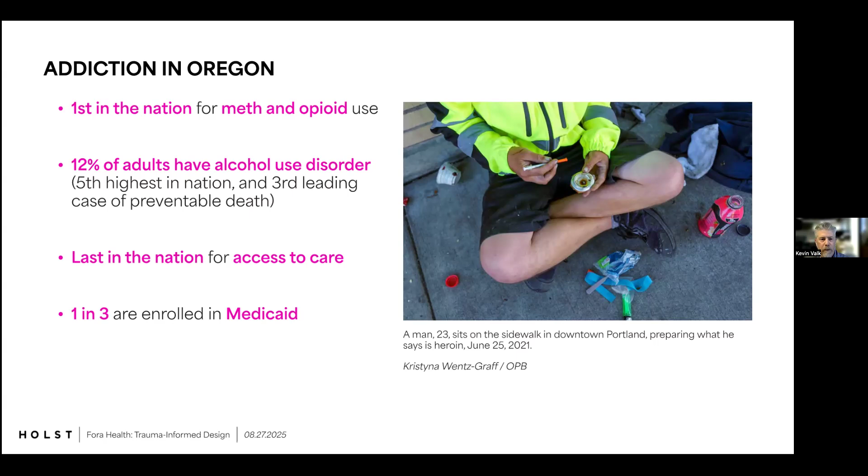Fora came to us with a mission that included essentially recreating their identity as an organization. They had done tremendous work for quite a number of years, but they were stuck in a 4-story building downtown that really didn't suit their needs, didn't have an elevator, and really limited the kind of care that they could provide.

They really had this vision of creating a healthcare environment for substance use disorder, and to treat folks who have that with respect and dignity, and provide them with the best potential or chance of a positive outcome. So they came to us, and they had Swen Ho, who some of you might know with Resolve Architecture and Planning, who was also with U of O for a long time, on their board at the time.

And she worked with them to create really a number of goals, and even some sketches to represent what that could be and the feeling that they were looking for. And so we started this process with them, looking at that and understanding their program.

They were looking for 70 adult treatment beds, 24 medical withdrawal management beds, also known as detox, and an outpatient clinic to serve 450 people. That, I think, doubled what they could do in their downtown location at the time.

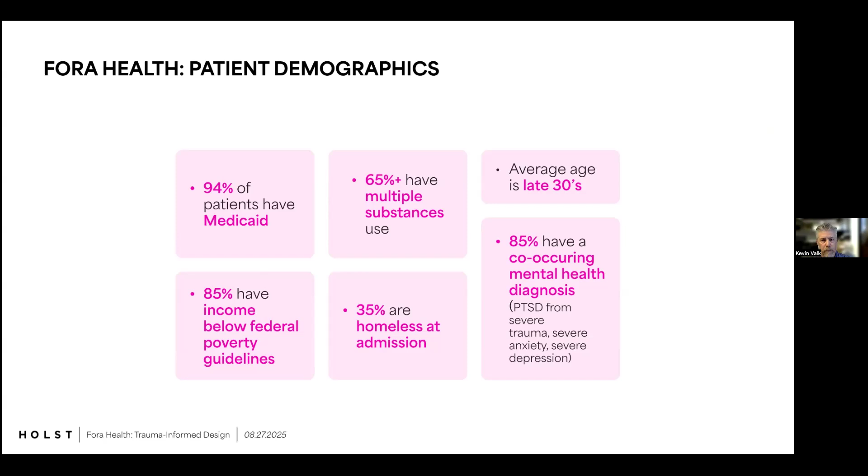Thanks, Kevin. I think having that demographic information really helps us understand why trauma-informed design is so important in the substance use treatment space. A lot of people are coming into the space from a place of pain.

So I'm going to give us a quick primer on how we think about trauma-informed design and some of the strategies we've tried to implement, and then we'll look at how those were applied to this building. We're always learning new things in this field, and it seems like every new conversation with providers and peer groups gives us some new insight. So we're not experts in trauma-informed design, we're learning alongside everybody else. But this is what we know right now.

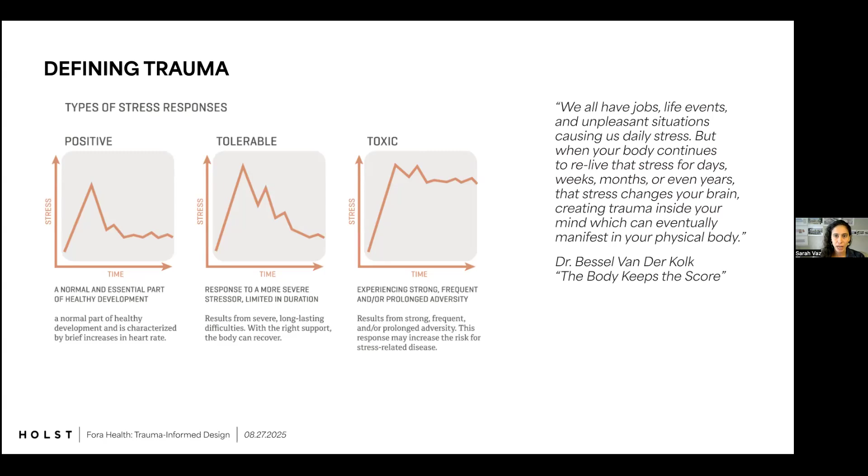I found this working definition of trauma to be useful, really understanding it as a physiological stress response in the body. The left-hand graph shows a healthy stress response where your heart rate spikes and then drops quickly once the body assesses that there's no threat. The right-hand graph shows a trauma stress response where once your heart rate spikes, it stays elevated, and that can be really challenging to come back to a neutral state from.

So our goals for trauma-informed design are twofold. On one hand, we have reducing stressors in the environment to avoid triggering that stress response in the first place. And on the other hand, we're also trying to foster well-being in folks so that we can bring people back to themselves in their healing journey.

Our strategies fall into six buckets. On the reducing stressors side, we have comfort, safety, and de-escalation. And on the well-being side, we have comprehensibility, meaningfulness, and manageability. We've shared a lot of specific information about these strategies on our website. I'll touch on how these relate to the addiction treatment space, and then we can get into how they work in this building.

For reducing stressors, comfort: we found acoustics and lighting in particular to be of concern in these spaces because of the construction type. We end up with a lot of firewalls or fire partitions, and doors in fire partitions have to have closers, and those closers tend to slam. That becomes a big problem for sound. Any hard surfaces in spaces like dining halls or bigger gathering areas tend to bounce sound around and feel chaotic, reminding people maybe of being institutionalized, so we're incorporating acoustic treatment wherever possible. With lighting, people in recovery or going through withdrawal often have heightened light sensitivity, so dimmers and indirect lighting become really important.

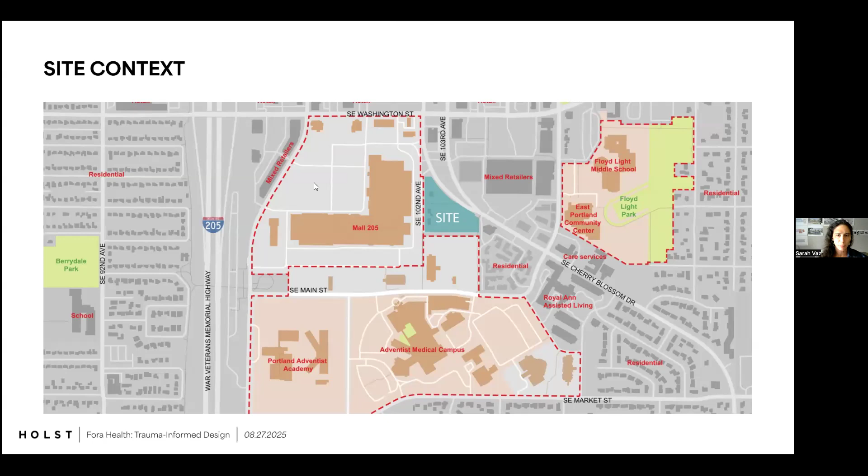So I'm going to talk us through the design points, and then Kevin will jump in with some of the things we've learned. To give quick context, we had this oddly shaped site behind Mall 205, north of the Adventist Medical Campus in East Portland. We had a nice stand of old growth trees at the north end of the site, so we knew the building would be pushed to the south. We also knew we would need to incorporate green space, so we started with an enclosed courtyard, which evolved to open up and really embrace the whole site.

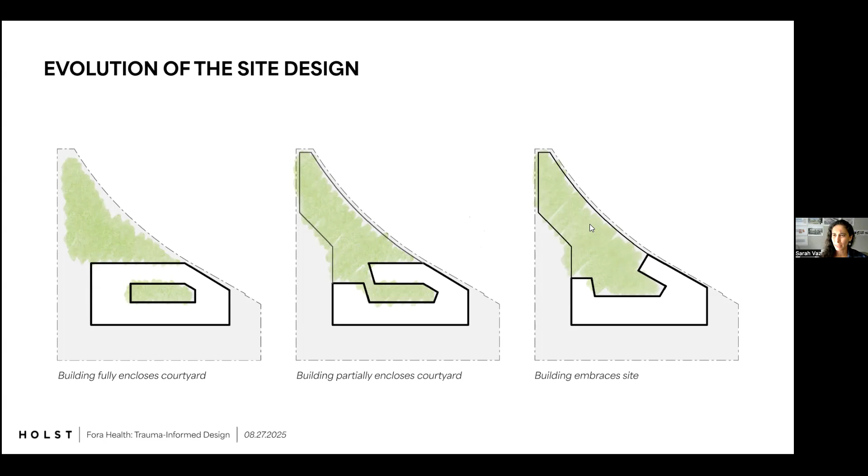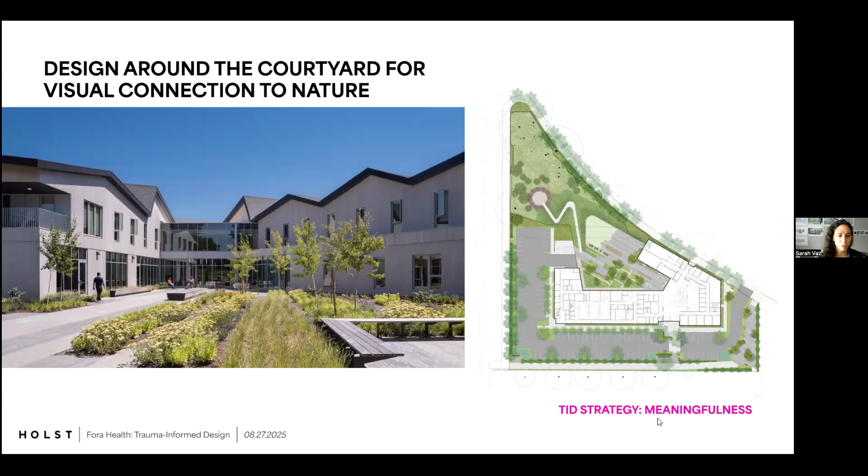Opening up the building to the outdoors became a really key way that we created that physical and visual connection to nature. That relates to the trauma-informed design strategy of meaningfulness.

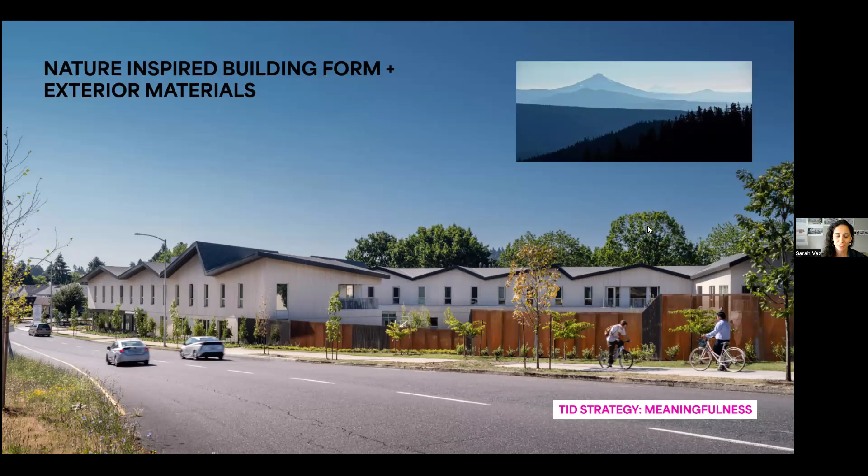The building itself is made of stained Western red cedar, and the roof form has these asymmetrical gables inspired by the Cascade Range—a further attempt to connect back materially and conceptually to the natural beauty that surrounds us in this part of the country. Again, the meaningfulness strategy.

And another point on the exterior: we've got this really strong entry that helps people coming into the building for the first time know exactly where they need to go.

Some of the lessons we learned through our investigations and our understanding of the next projects we're working on—some of them positive, some less positive. But in this case, a lot of our lessons learned were pretty positive takeaways.

So the courtyard actually became even more integral to their operations than I think we ever imagined. We knew the outdoor space would be hugely important, which is why we organized the building around the courtyard and enveloped the site with fencing. It's become a huge part of their program and their treatment—I think more than they could have envisioned before, with their location downtown.

The warmth of the wood on the exterior really helps foster that sense of welcoming into the site and into the building. It's something we've actually been working with them on across multiple other buildings—rather than form, we're bringing materiality across projects, which has proven quite helpful.

And the obviousness of the entry—it's easy to think, as designers and architects, about how important that is. Sarah and I were talking this morning about how, for us, it's very obvious: you approach the building and know this is the entry because we worked on it for so long. But we think there's a clarity to the composition, a clarity to the material change. That's something that's hugely important when creating a campus of buildings, which is what's happening on this campus and other locations—to create that sense of entry and identity, to make it very clear to folks who don't always have the clarity of mind to give it as much thought as we might want, that we're providing that obviousness to the building.

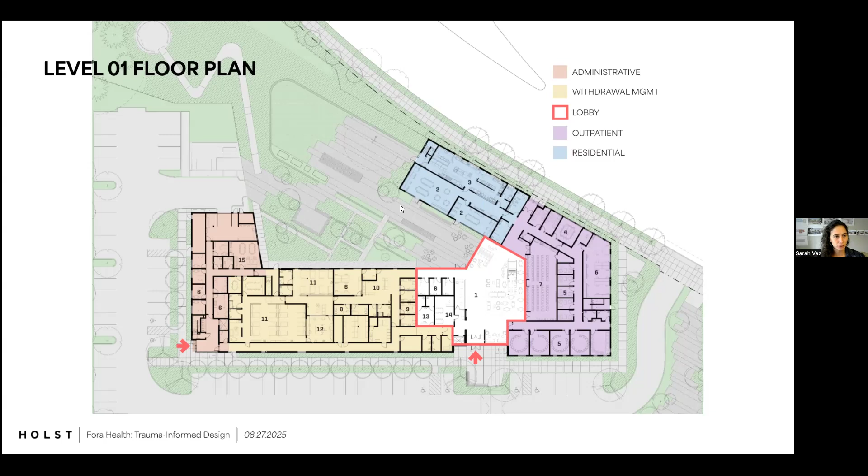By having staff greet you and point you in the direction you need to go immediately upon entry. So you can see admin is in orange, withdrawal management, or detox, is in yellow, outpatient is purple, and residential is blue. Residential is primarily upstairs, but downstairs they have their dining space.

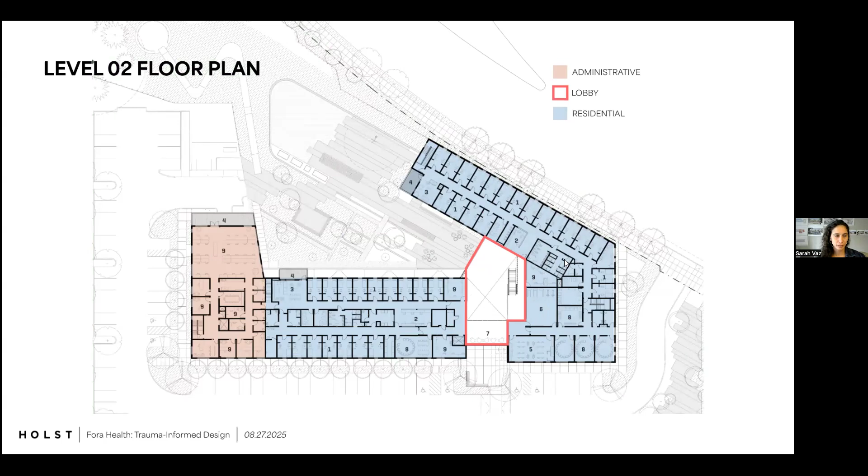But we did learn some things. Although I think the lobby and the diagram of the building really achieved the goals they came into the project with, once they started operating, it became clear that they might want to rethink their goals.

So it brings a lot of folks together into one space. Unfortunately, what it can do at times is create a lot of confusion. There's a lot of folks in the space with different programs, and so there's some safety concerns at times.

COVID didn't help. They created a separate entry during COVID for withdrawal management, so that folks coming into that program weren't coming through the main lobby. That was really an eye-opener for them, that running the program with separation is more important than having a single desk.

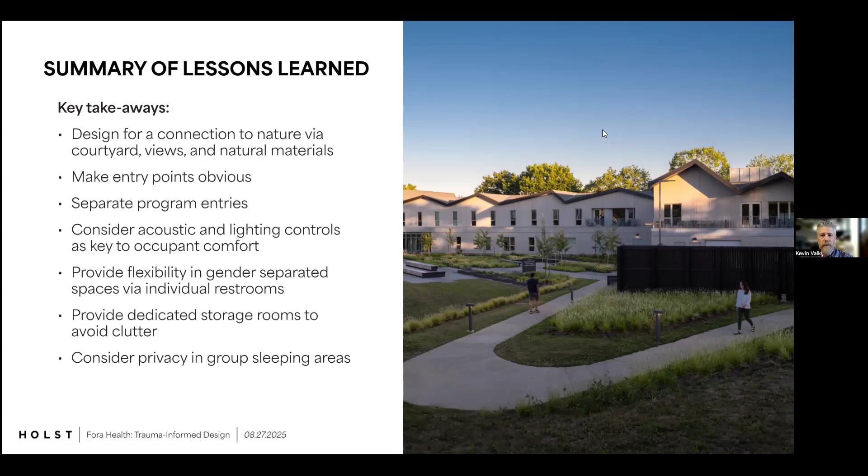So I think we just went through all of those, but for us this is an ever evolving process with these clients and with the community at large. A lot of providers have a difference of opinion on how things should function and operate, so we're using all of the projects we're working on in this space to take our steps from one to another. What have we learned? We're sharing across projects and with different clients about how we can perfect spaces for folks, knowing that needs change, and the substances people go through or come off of change. How do we create a space that, regardless of all that, is still respectful, peaceful, and meaningful? That's our goal now with all of these projects.

Some of the outcomes we've been able to learn from Fora: it's really allowed our treatment completion rates to exceed the national averages, which is wonderful. 100% of their patients leave this building with some place to live, and that's one of the things we're most proud of. That's not because of the space itself, but it gives them the ability to reach out to other providers and make connections to the community to provide that. Higher acuity patients get treated, something they couldn't really do before at their downtown locations. Adjacency to the Adventist hospital also allows primary care relationships to be strengthened between their clients and their providers.

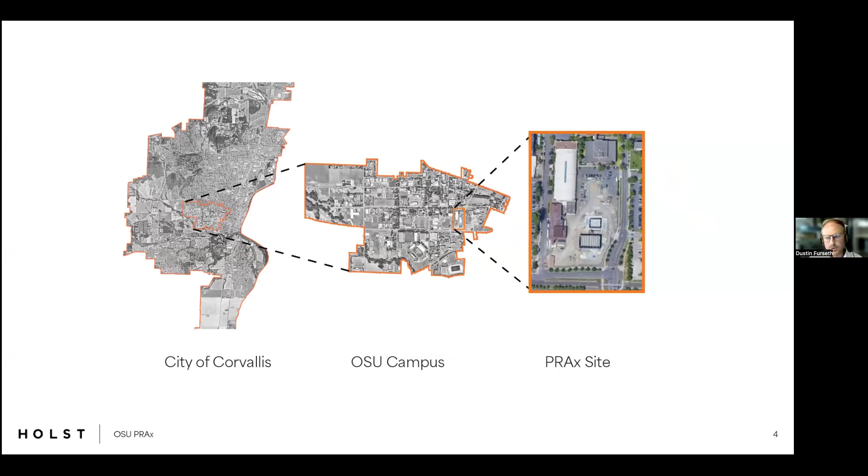So just to quickly orient everyone, in the off chance someone doesn't know where the OSU campus is, we're in Corvallis, on the eastern side of the campus, close to downtown. This was a site that had sort of university service sheds on it, so it was kind of an open slate site.

So a big part of our initial process figuring out what we're doing with this building was a lot of discussions with OSU, and we decided we needed to create a list of guiding principles to help us choose, pick, and evaluate design on all scales.

So we obviously started with creating a cultural arts district, and what that really meant here was it's going to be a new hub for visual and performing arts. We wanted it to become an iconic destination, unique, with valuable culture and dynamic architecture.

We wanted to collapse distinctions, which I talked about—this idea that there's not a front of house and back of house, or at least we blur the line between them. We're prioritizing education.

So every space needs to be a teaching space. It's going to be an art incubator space, so that influences the program, our decisions about where we're putting student art versus professional art and how that's being displayed.

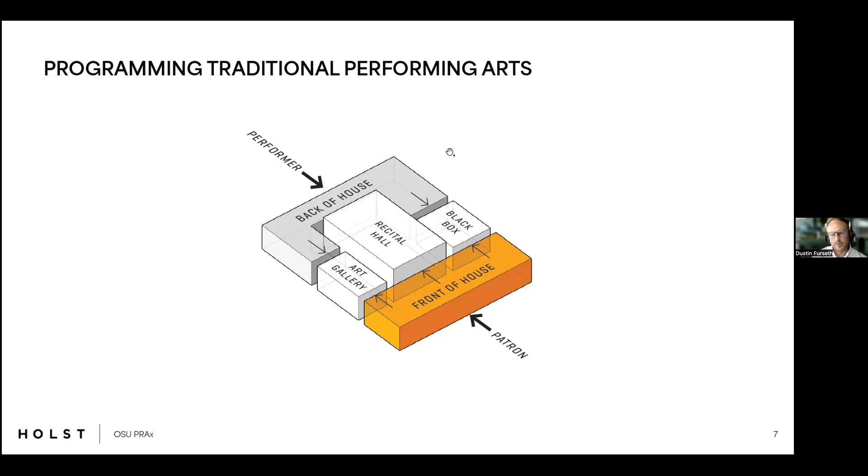So one of the first ways we tried to collapse that distinction was to pull some of that lobby through the middle. That enhances the acoustic separation between the black box and the recital hall so they don't share the same walls, but it also starts to let a patron who's there at a show walk through areas that would traditionally be off limits towards the back of the building.

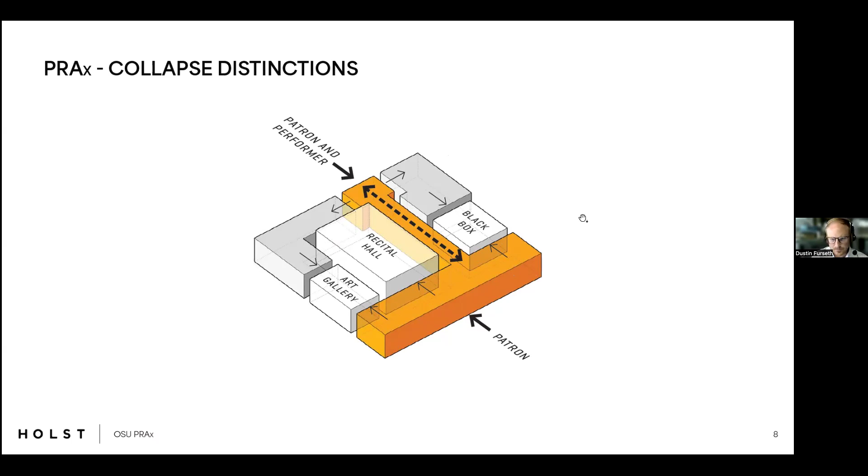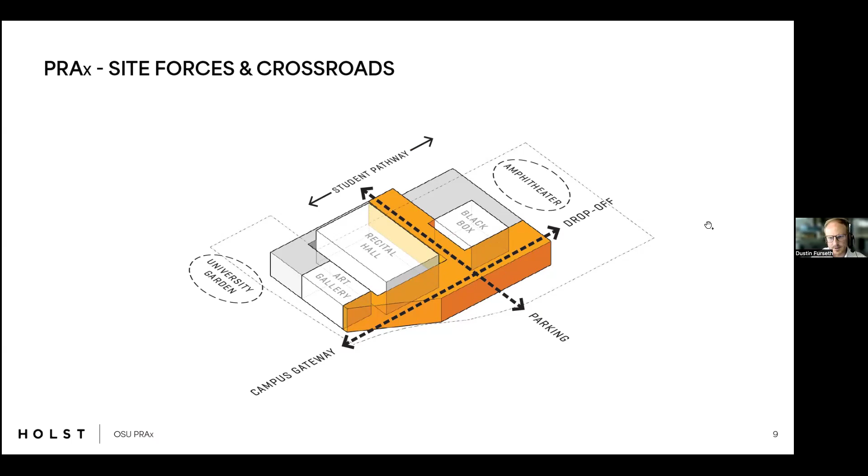Then that morphs - this is a diagram, as we blend it into the site, it has some geometries you'll see in the architecture, but really solidifying this idea of a crossroads of students, performers, staff, and community members, using the lobby as this piece we celebrate in the architecture, and it expresses itself on the exterior. That led us to a form that we started to pull and carve in a conceptual way.

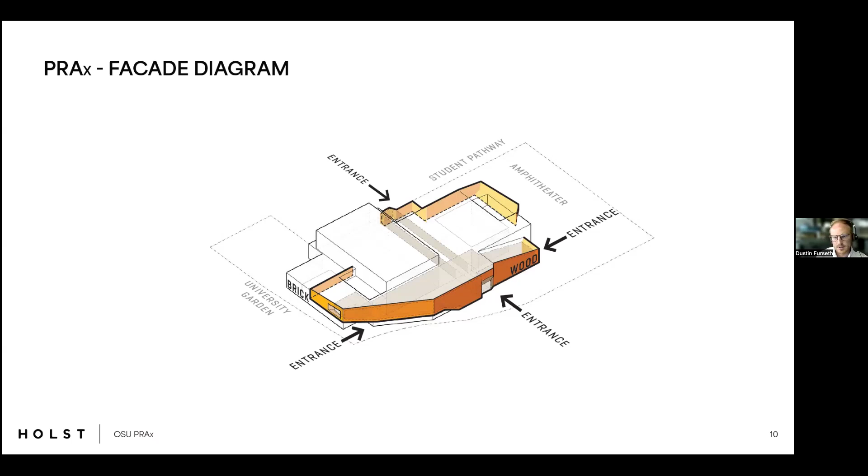Then we started to marry that with a material palette that's kind of OSU identifying - wood. They have timber research on campus, and obviously we're in the Pacific Northwest, so we really wanted to use wood as a major expressive element on this building.

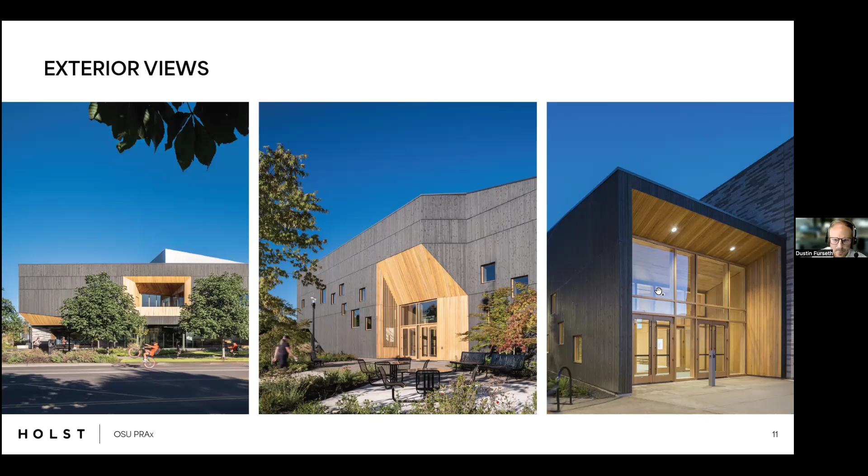So the images I'm going to show you here are just a couple snapshots around the building. When you see the vibrantly stained natural cedar, that indicates an entry or some major point of interaction with the building. The building has 4 entrances, with elements carved away where people can occupy an upper terrace on the left. Center image is the main entrance on the east of the building, and the image on the right is the entrance on the north, and then how that wraps around the building.

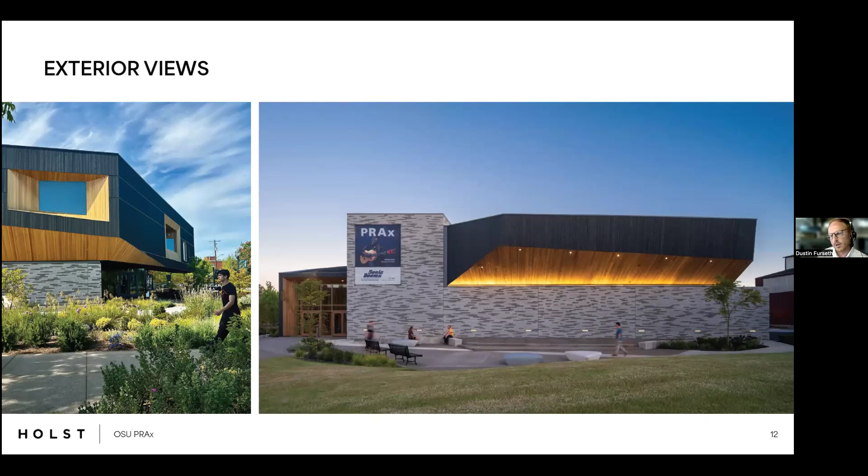There's an outdoor stage amphitheater space here on the right, underneath that overhang. It's a projected volume out towards us, and the angle is cut at an acoustic angle to project sound without amplification onto the knoll that we're standing on.

And then as we look at the material palette, we wanted to use brick - it's a big thing on campus - but we wanted to be much more neutral so that the darker, rich wood of the entrances really pops.

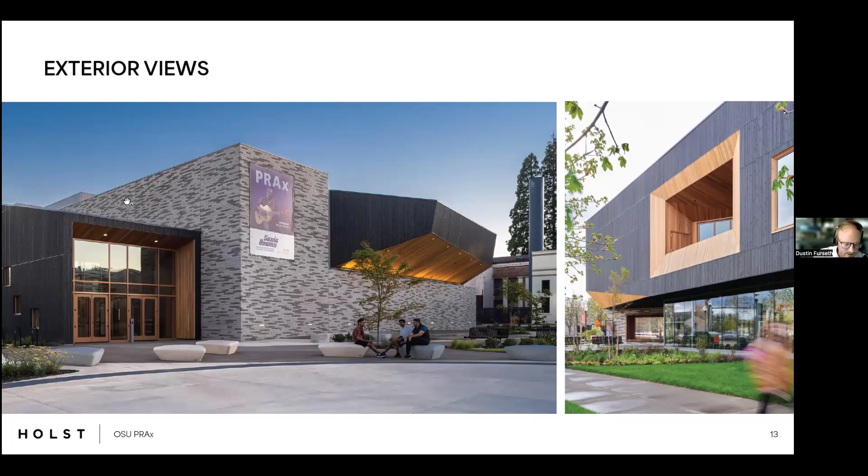I'll quickly talk about the plan, and then I'll let Kim walk us through the more illustrative photos of the interiors.

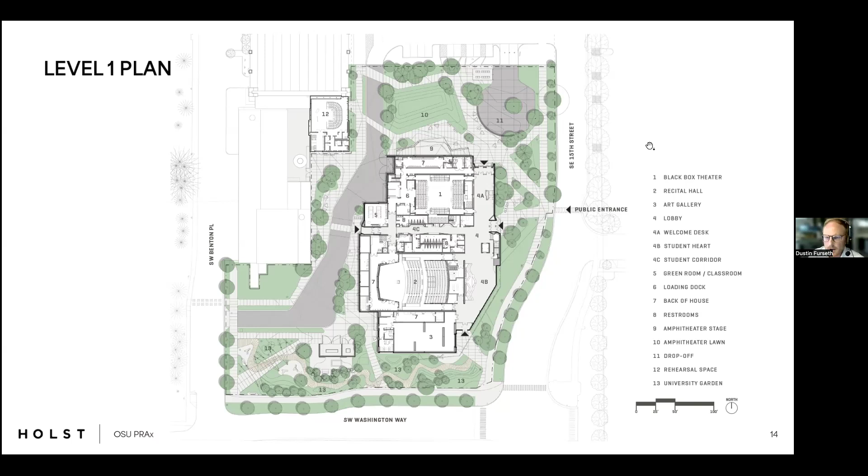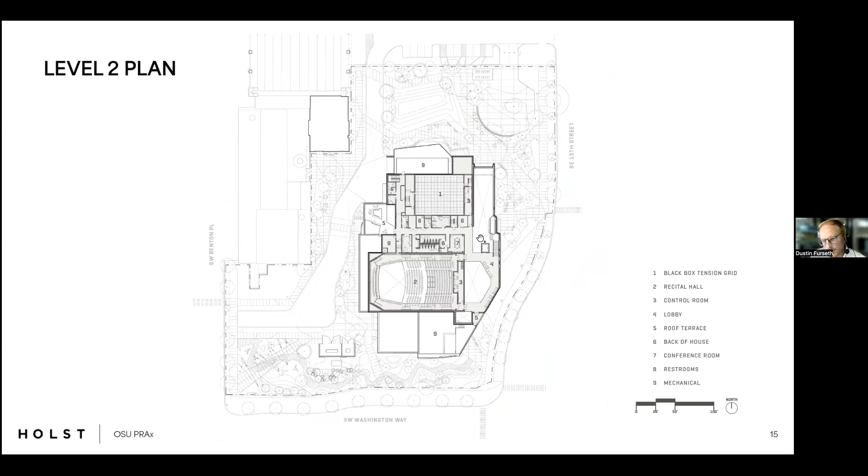As I transition to Kim talking here, we're going to start in the lobby. The lobby is broken into about 3 different spaces - they're associated with the venue, but also with different uses. There's a second level, but it's mostly about support and circulation into the recital hall, but it also has a lot of the student spaces in the spine that goes east-west, ending at the lobby on the east and on the west at a roof terrace.

In this space, it's one of the more refined kind of palettes that we have in the project, but you'll see that as we work our way down to the south end, we start to pull away some of that refinement of the wood and expose more of the structure of the building, in a similar vein of the collapsing distinctions that Dustin was talking about. We're always trying to do that push and pull to see how the building's really working and put together.

Of course it's a pre-function space to support both the black box theater, which is the Ray Theater just to our right, and then as you go down toward the art gallery and the performance hall, the reception desk also pulls away and banks back - it's on rollers and banks up against the wall, again in an effort to utilize the space for banquets or exhibits in some way.

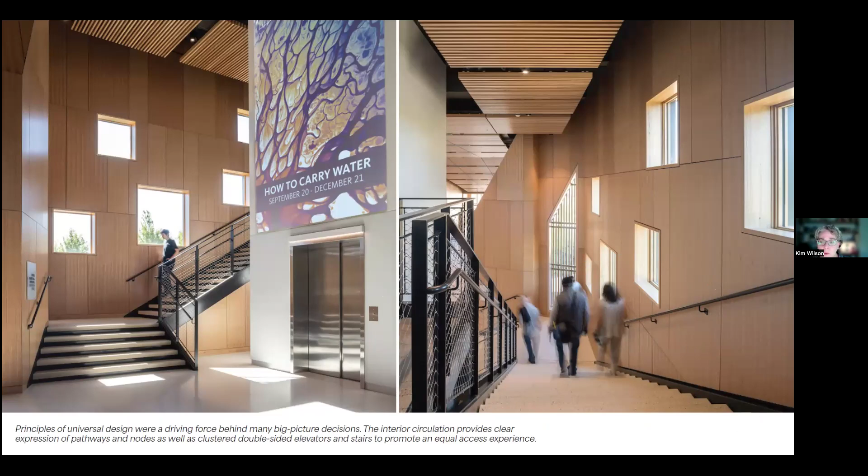So it's fully equal, and accessibility is at the forefront. We designed this elevator to be a pass-through, so there's no turning around once you get inside. It puts you out on this mezzanine second level that overlooks the student heart area.

You'll see the exposed structure, which we took some care with, and have to shout out to Hoffman Construction and their subcontractors for all the work coordinating these elements. Exposing structure is not simple, as everyone knows.

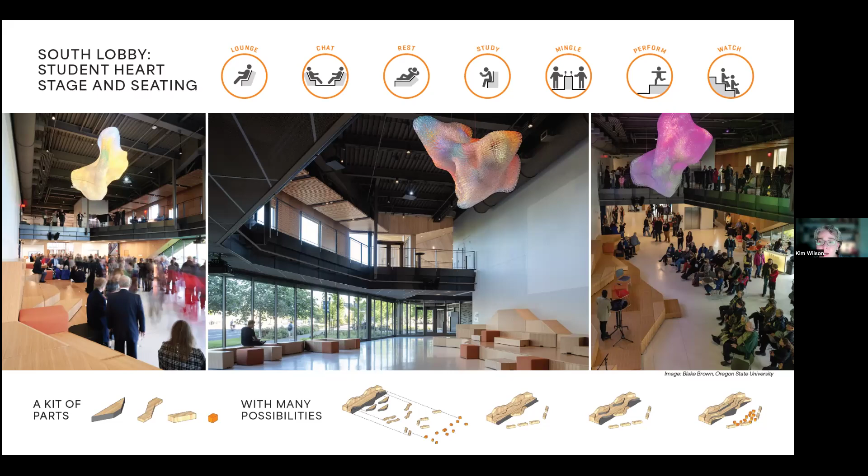Over the stage is the only permanent art piece in PRAx, by an artist, Refik Anadol, I think I say his name right. This is actually a perfect combination of OSU's desire to combine art and technology and science.

This is based on digital data collected by OSU and put into basically a projection, so this sculpture is ever-changing in the space. It's pretty impressive to see.

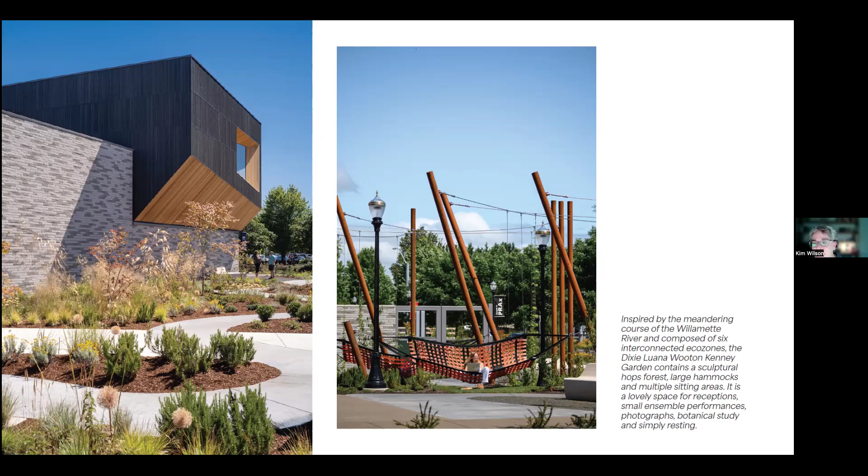And then I think we'll just end on a shot of some of the finer grain details. We really tried to hold to that idea of weaving and carving into these spaces, and we're really excited by the high quality of craft and the way this project turned out, both from a program and use standpoint, and also just from the beauty that was created here by our contractor.